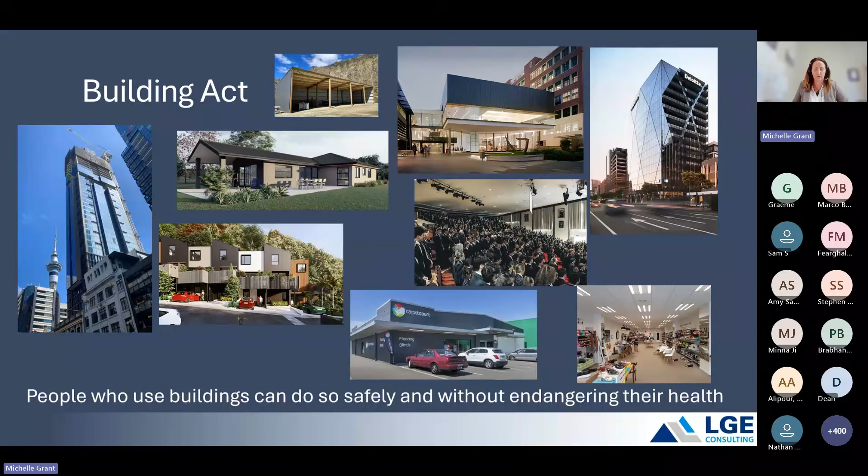In New Zealand, we have a Building Act. And the Building Act sets out the goal that people can use buildings safely. That's priority number one. To achieve this in the design of our buildings, we have our 3 compliance pathways. We have acceptable solutions, we have our verification methods, and we have our alternative solutions. One is a pre-packaged structural solution, whereas a verification method requires a higher level of skill and following some methods and procedures.

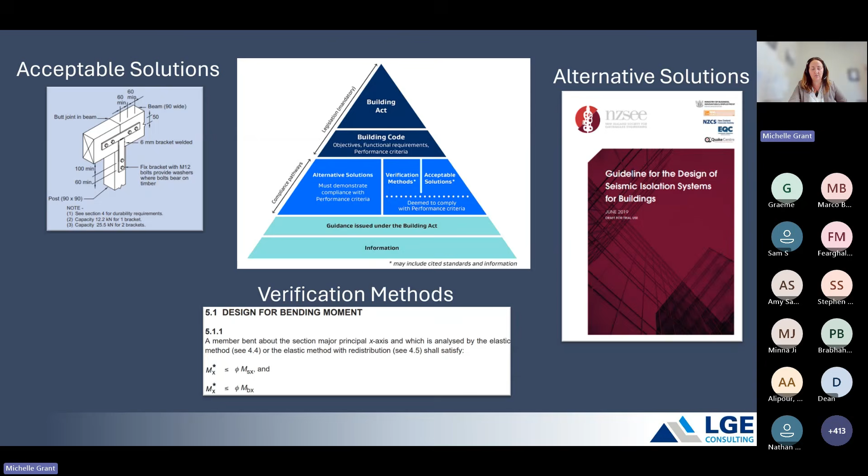And the other is alternative solutions, which tend to be for things that are a little bit more outside the box. So we have a pre-packaged structural solution, a method that requires more skill following methods and procedures, and something that's for things that are a little bit outside the box. My focus today in this presentation is on the main pathway that design engineers use, which is the methods provided within the verification method pathway.

So in a seismic context, design standards for engineers include provisions for seismic systems in buildings, for systems to resist lateral sideways forces, a lateral force resisting system. And the development of a lateral force resisting system is quite a process. A seismic lateral force resisting system is a lot more complex than a gravity support system. It requires a well-configured system detailed for an inelastic mechanism to safely dissipate seismic forces.

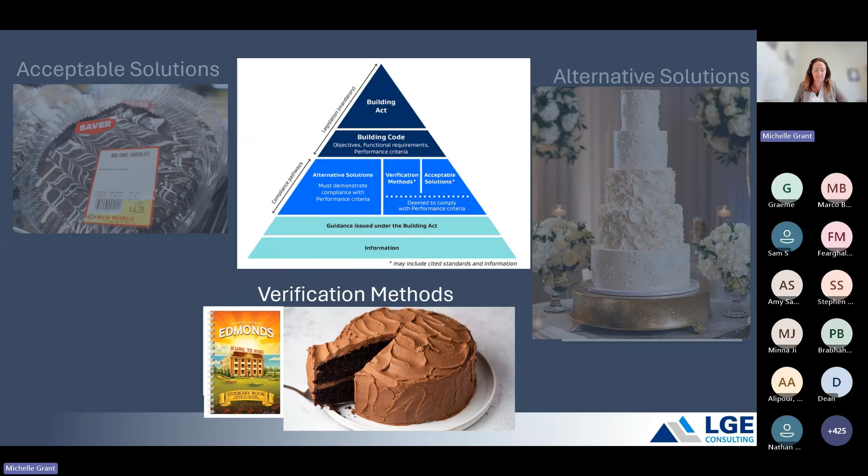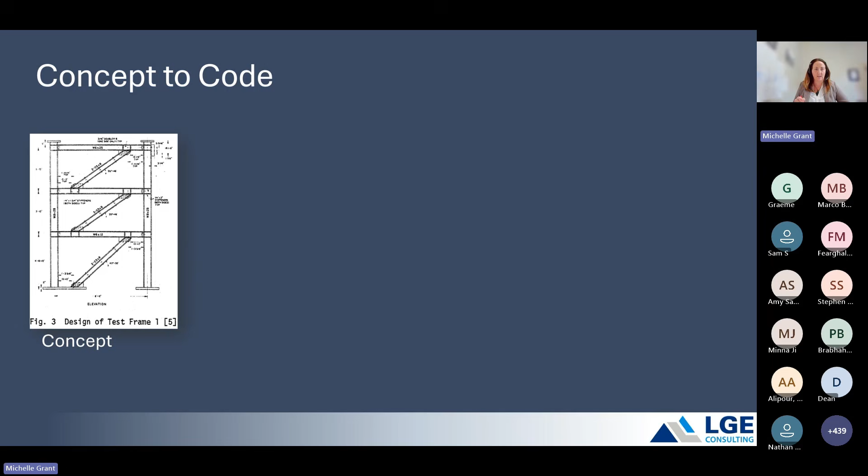There's quite a journey, a proper journey from concept to code. We design these systems using our design standards, our codes, and then we go out and we observe how the system worked in real-world earthquakes. We look at what happened and how it behaved.

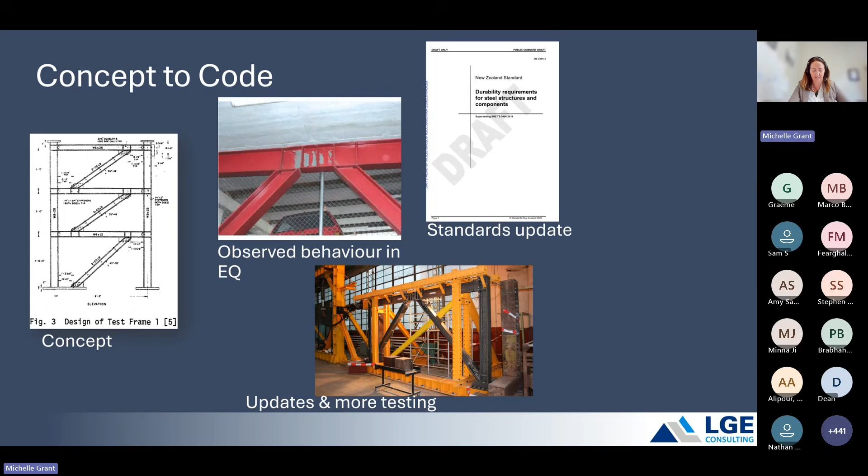After this, we usually head back to the lab and we do some more research and some more refinement, which inevitably leads to updating our design standards and eventually citing these updated standards in our verification method. And we do all of this work to provide a verification method compliance pathway for designers to use.

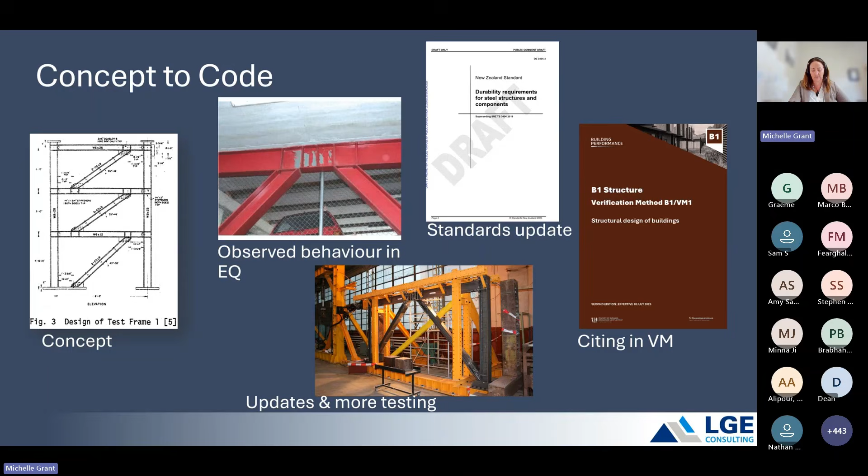And it shows that not all students achieve an A grade. It's fair and reasonable to assume that the same spread of abilities would be reflected in the engineering profession. Not all of us are A-grade students. The majority of engineers, it would be fair to assume, are competent but not experts.

In the year ending September 2025, the value of consented building work in New Zealand was just over $26 billion. And 2/3 of this, a fair proportion, is made up of residential construction. Standalone housing made up $11 billion, a total of 41% of consented building work. Non-residential construction made up the remaining $9 billion, or 1/3 of consented value.

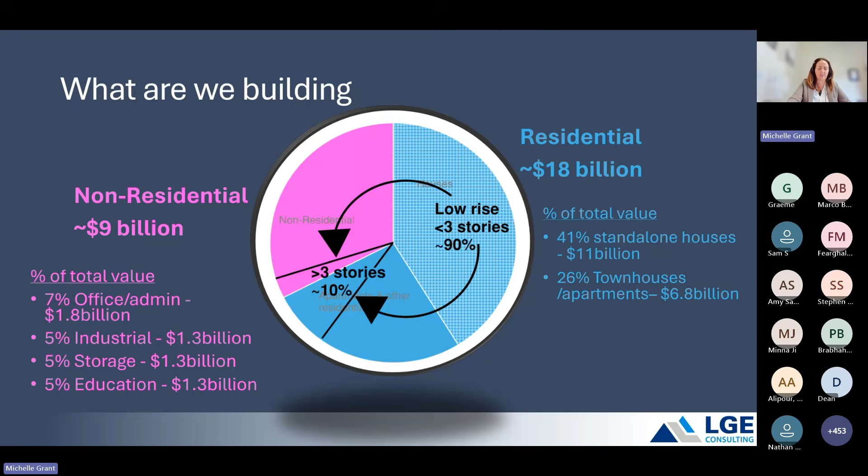Let us now turn to the design of structures for earthquake loads. For this presentation, I have compared our New Zealand design requirements to those of the United States of America, which do tend to follow a more prescriptive approach. The New Zealand standard has some quirks, shall we say, when it comes to the derivation of our loads.

We have a somewhat overly complex and inconsistent load treatment. New Zealand standards require live load to be included with both usage and area-based reduction factors. We also have an additional 8% roof mass lumped at the top, creating a more complicated process with significant variability that does depend on engineers' assumptions, particularly around superimposed dead load. There are some very different approaches to this in New Zealand.

The area reduction penalises small structures, and if you combine that with certain occupancy categories, it can cause live load to dominate seismic demand in lightweight buildings, despite these loads not being representative of actual seismic mass. If we compare that to the USA approach, where they have a simple uniform superimposed dead load prescribed, live load is largely excluded from seismic mass. New Zealand's method is less transparent and can lead to inconsistent outcomes. They also don't have the 8% lumped mass in their structures for equivalent static.

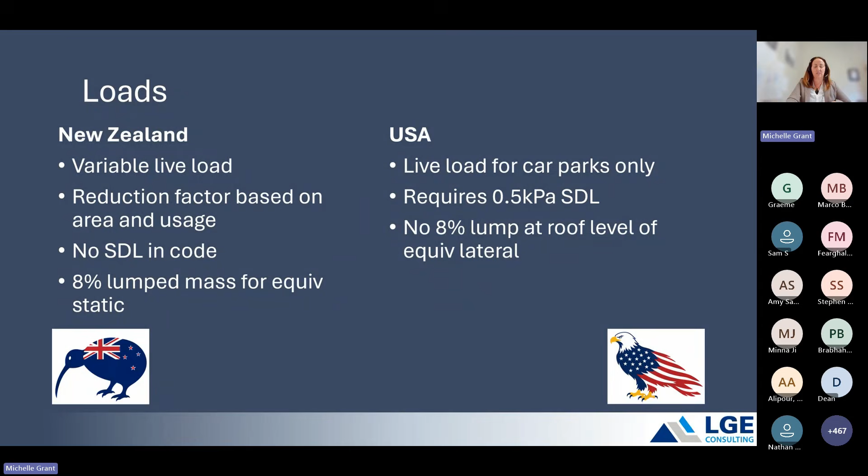Once we have our loads, our demands, the first step in the design of a seismic system is choosing which lateral force resisting system to use. In New Zealand, the loading standard 1170.5 does not prescribe lateral force resisting systems. The description and definition of a lateral force resisting system is designated to the material design standards, which have varying approaches. But for a design engineer, the focus at the start of the design process is on adopted ductility, not on the choice of lateral force system.

For steel, 3404 sets out seismic design requirements for braced and moment frames, with detailing in Chapter 12 and ductility values in Appendix B. This standard's probably at the more prescriptive end of the New Zealand framework. For concrete, 3101 requires engineers to identify potential plastic regions. It defines limits on strain and curvature ductility via the KD factor, which is linked to overall system ductility.

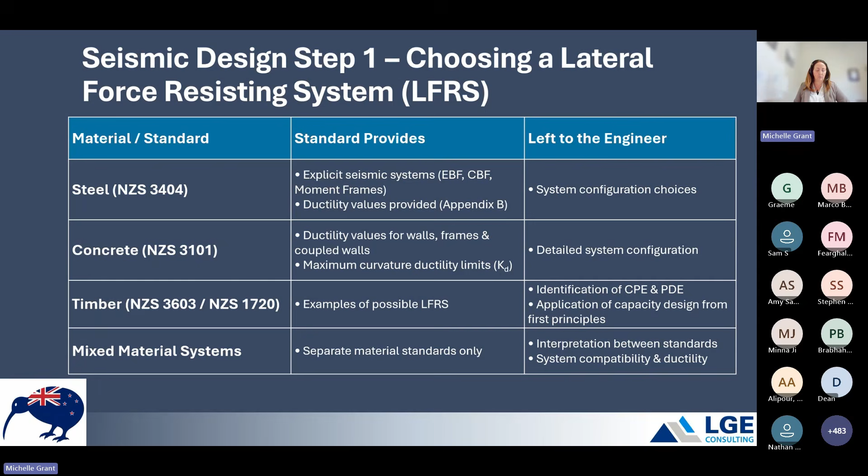We also don't have clear limits in New Zealand on when a designer can use a certain system. And this leads to engineers designing structures, for example, as this one here, with plasterboard walls providing support to masonry block walls out of plane. Plasterboard walls holding up something very heavy out of plane. Another common example is non-ductile cold form steel frame structures supporting heavy, tall precast concrete panels, which you see on industrial and commercial buildings across New Zealand.

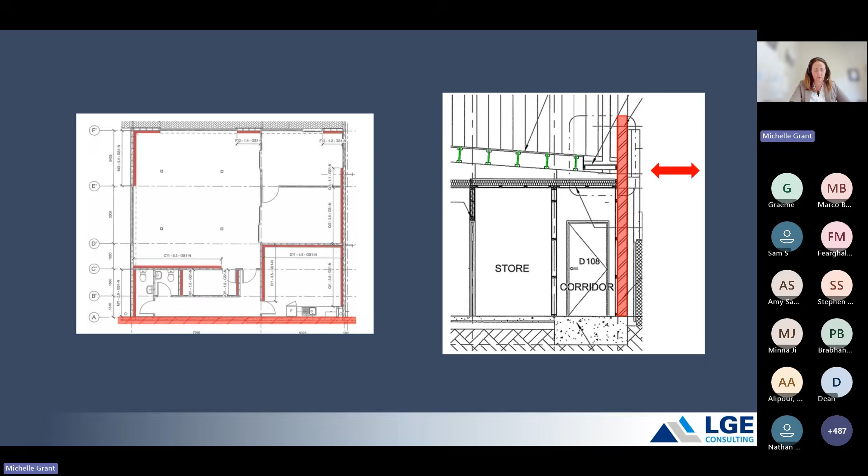In comparison to the New Zealand approach, the USA loadings code, ASCE 7, has a large table of allowable lateral force resisting systems available to the design engineer. It limits design choices to reliable, tested, and robust lateral systems. Design requirements for these listed systems are provided in the USA equivalent material design standards. The list is reasonably comprehensive. It's quite long, and it does include mixed material or composite systems.

It has very clear limits on the use of certain systems. A designer can use an ordinary steel moment frame. So for us, that would be a nominally ductile, so pretty low seismic capacity steel moment frame. They can use that in a high seismic zone. However, there are very clear limits on height, how high it can go, and weight, what it can hold up. You can't hold precast concrete panels up with such a frame. Look, it's not all green on the other side. The content of these tables in the US is very contentious, from the process of how they add systems to the tables to the values for ductility assigned to each system.

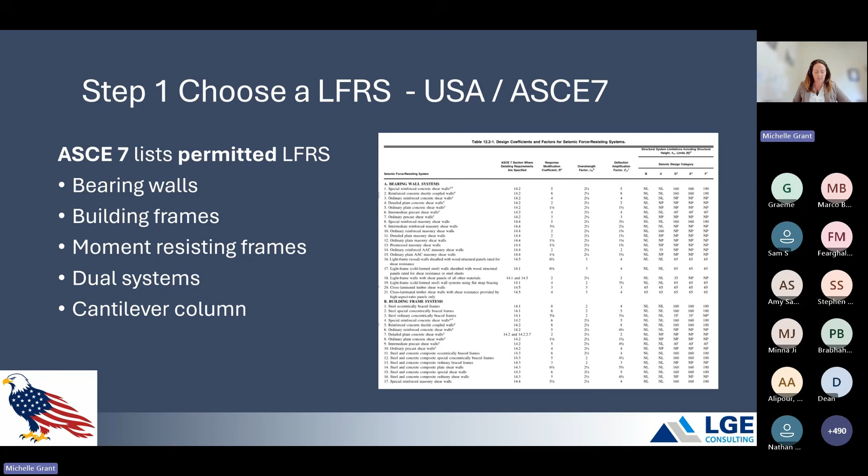Let's now take a look at the design steps for a lateral force resisting system. If we take something as common as a plywood shear wall, in New Zealand, the engineer must design every component from first principles. Listed here are the design steps that we follow from NZS 3603, from nail shear capacities to checking the plywood sheets in plane. Each component is checked and designed so the engineer then comes up with a system.

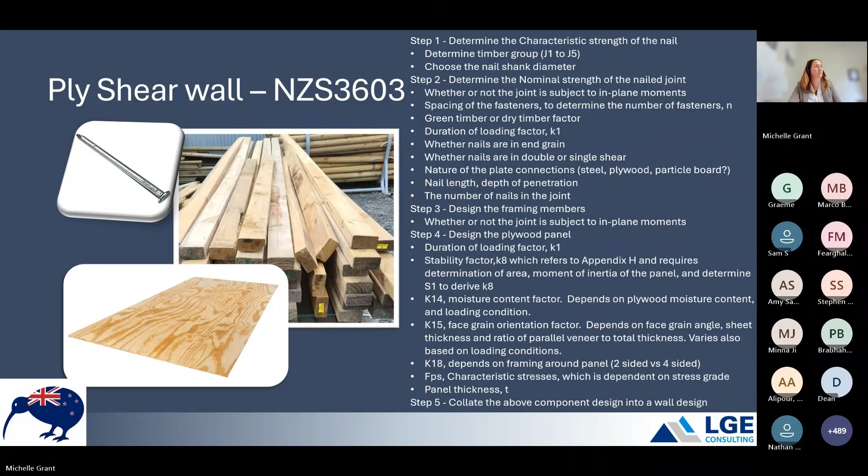In the US, the engineer selects a system from a table. If I need 8 kilonewtons per metre, it tells me that my system involves using 9mm ply lining on a timber frame wall with 2.8 diameter flathead nails at 150 centres, with a safety reduction factor then applied.

The USA standard, for this simplicity, does however require the designer to think more about how the wall system overall actually works. What's needed for the wall? Is it a standalone full height wall? Does it do force transfer around openings? Is it a punched shear wall? How's it working? What are the collectors doing and how are things joined together? So more of a systems focus as opposed to component design.

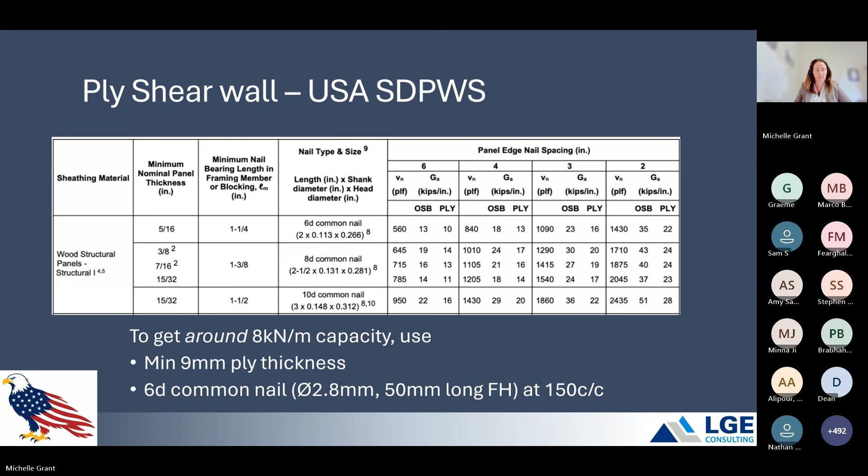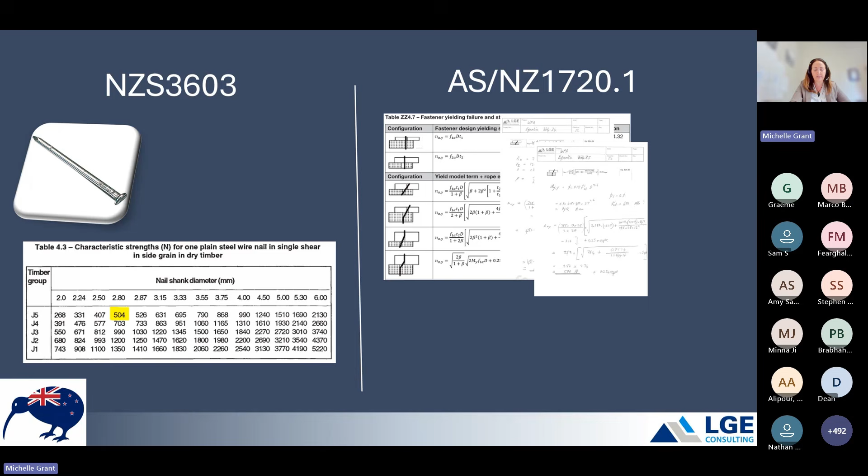And the New Zealand design process is becoming more complicated by the recent publication of the updated Timber Design Standard 1720.1, which is requiring more complicated and iterative first principles equations. And the question must be asked if the more complicated New Zealand process is providing better design outcomes for buildings in New Zealand.

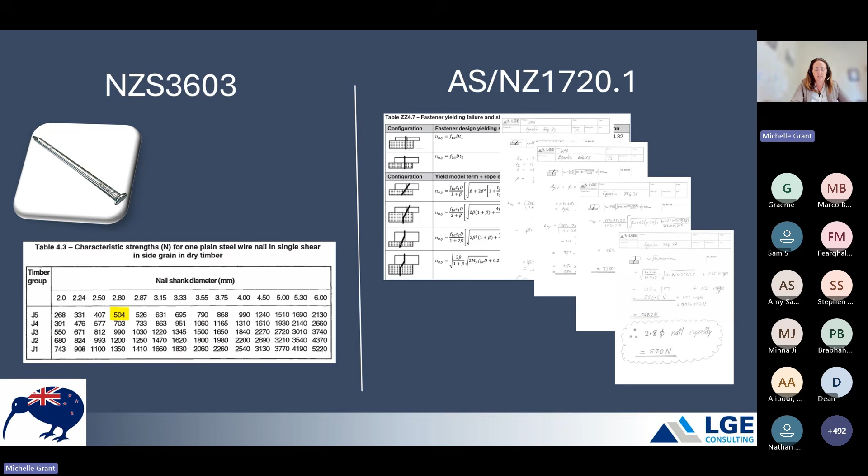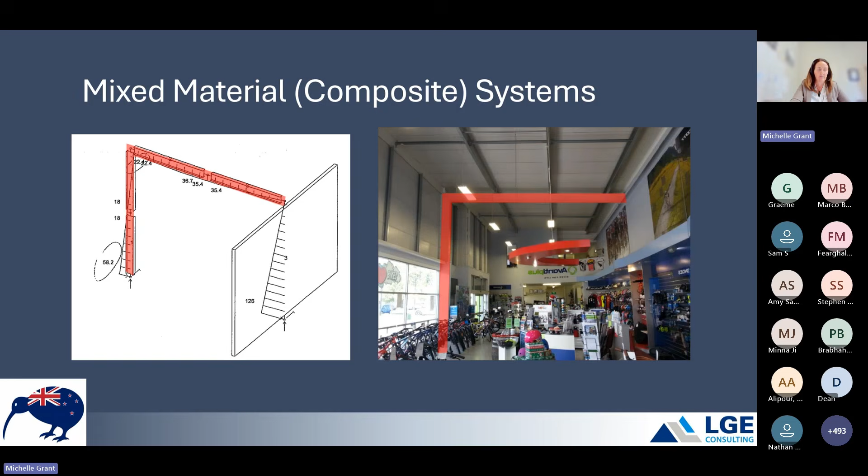In comparison, the USA provides an acceptable list of composite lateral force resisting systems within ASCE 7, and the design requirements for the composite systems on this list are provided within one of the material standards. One of them takes ownership for the system and provides the overall system design requirements. It's interesting to note that under the USA system, that previous example of the New Zealand attempt at a composite system would not be permitted. It's not a permitted system.

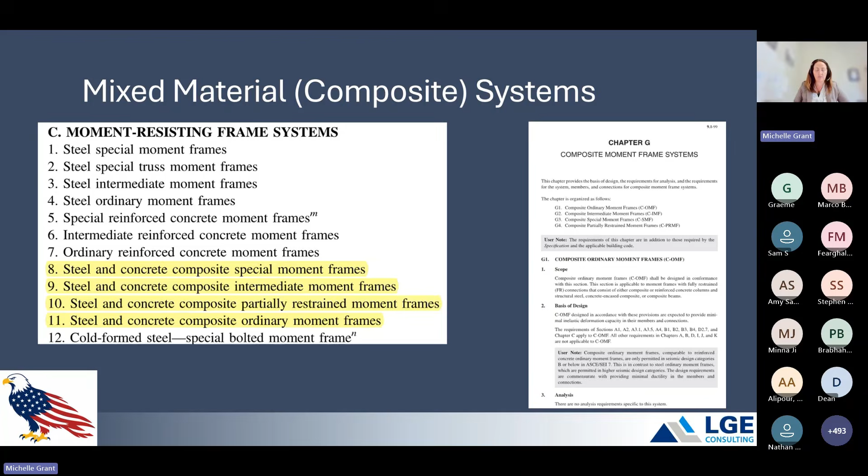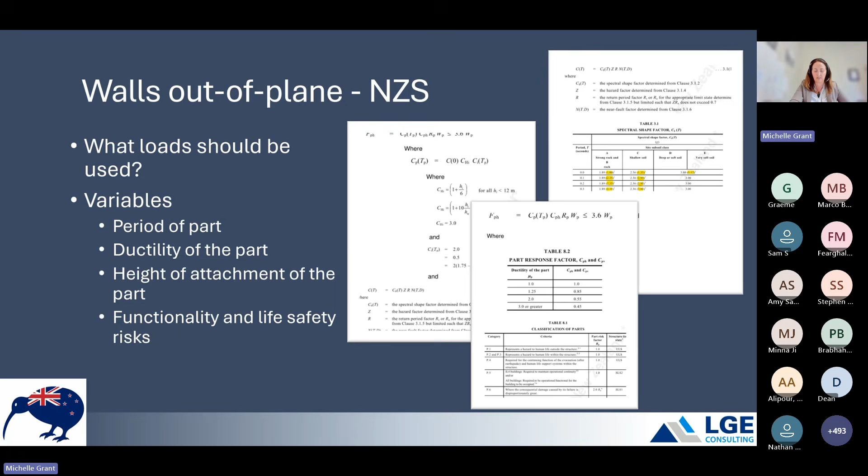What about the design of some of our building parts, such as a wall out of plane? In New Zealand, even a simple element like deriving loads for a wall out of plane requires some reasonable maths and interpretation of a standard for what is, you have to admit, a pretty common feature in pretty much all buildings. In the US, it's a simple formula of a portion of the short period spectral acceleration with an importance factor modifier.

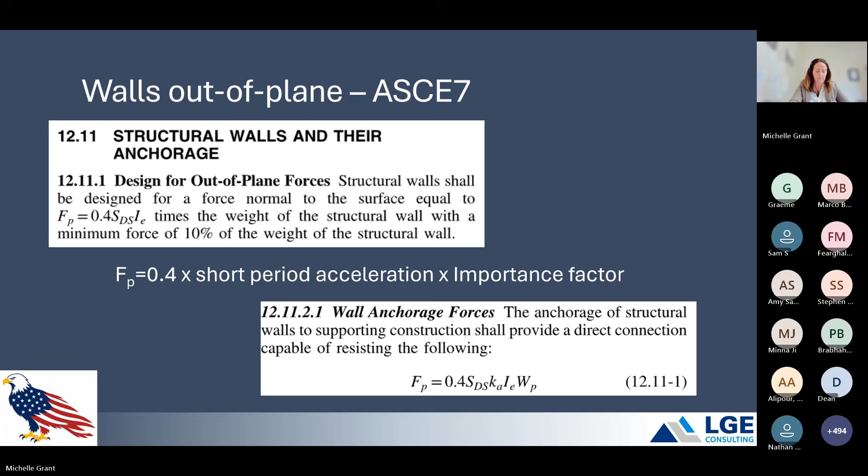What about the requirements for the anchorage of walls out of plane? Again, in the American standard, it's a very clear equation with requirements spelled out on when an engineer must check bending of the wall between anchorage points. If the spacing of my anchors is greater than 4 feet, I must check the bending of the wall between the points of anchorage. Some people call this prescriptive, but I think it's just clarity. And in New Zealand, even with our standard, with more equations, it was so unclear if parts applied to walls out of plane that it took a determination to confirm how we are meant to derive loads for this common feature.

In New Zealand, we have a system where components are certified, marketed and adopted by engineers. However, their use in a seismic system is either not fit for purpose or poorly executed. We have CodeMarks issued for systems that then seem to sit outside the available verification methods. If we compare this to the pre-qualified connection system that's used in the United States, these are connections that are pre-qualified and designed to ensure that they meet the inelastic rotation requirements of a specific lateral force resisting system. We know that if we follow these procedures, these designs will work.

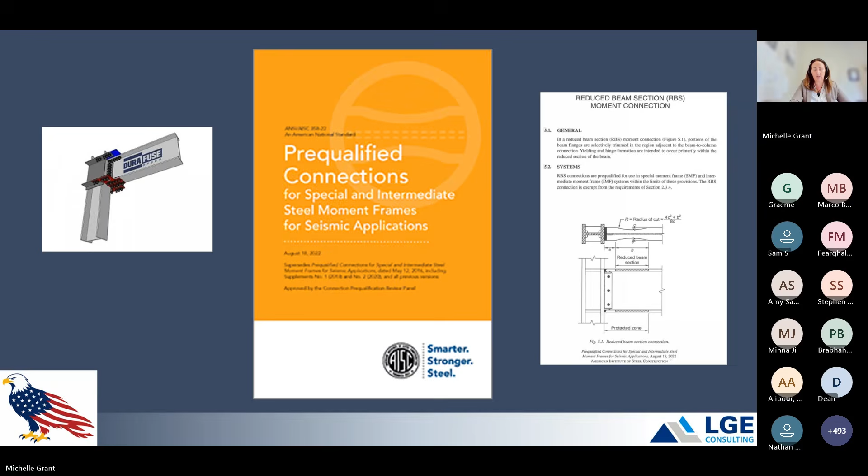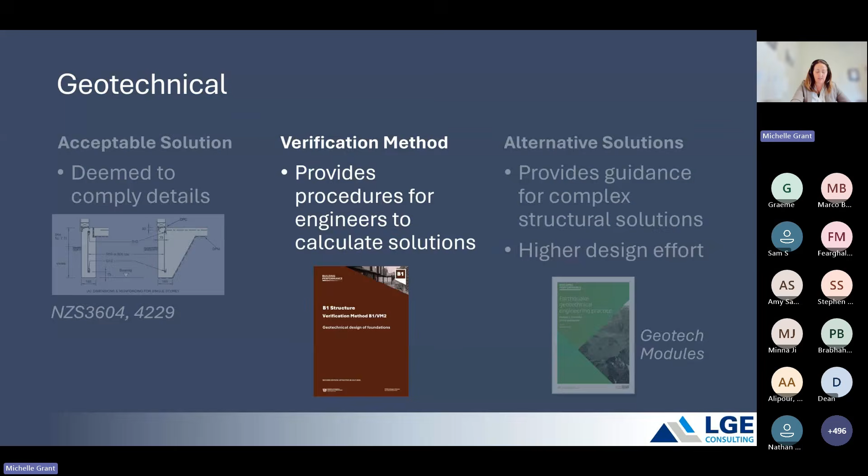What about geotechnical? Foundation design has the same framework of acceptable solution, verification method, and alternative solutions. But again, I'd like to focus on the verification method, same as I have for structures. For something as critical as foundations, as important to your building as the ground beneath it and the design of that, the confirmation of the ground model and soil parameters is outside the scope of VM2, the verification method.

In VM4, which is now VM2, safety factors were meant to be approved by the territorial authority, which does not and did not happen in practice. And I note that this is not in VM2 when it was updated, it's been removed. It's also a point to note that the safety factors clash with the geotechnical modules and they're non-conservative in the verification method.

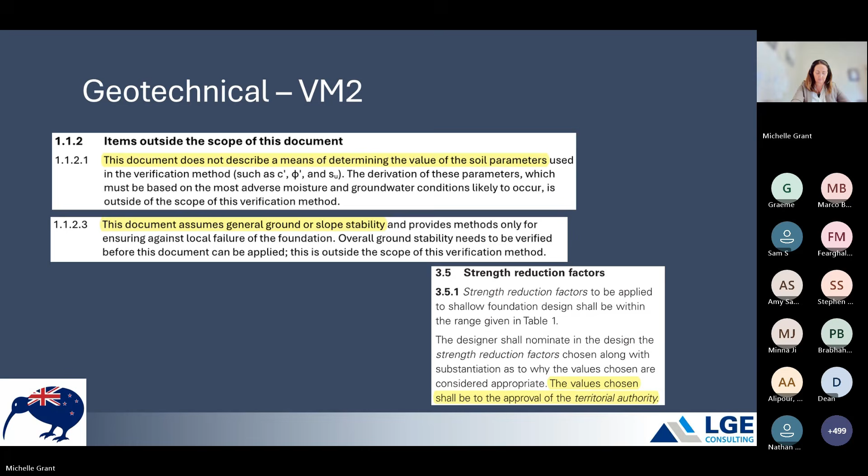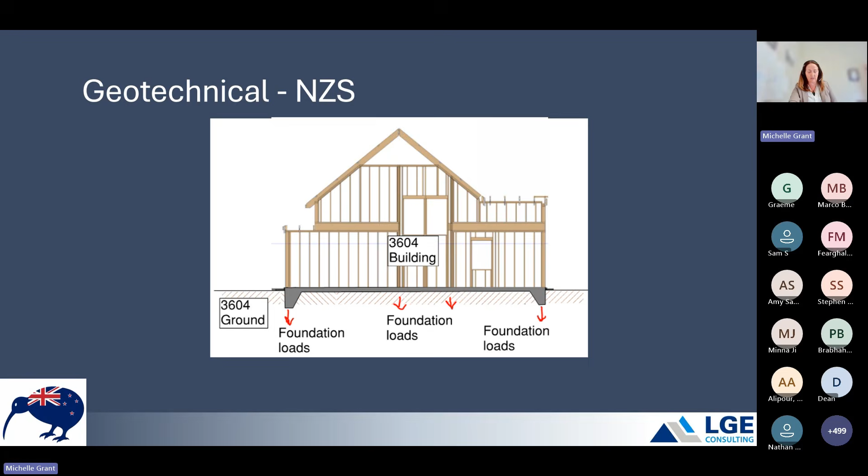For foundation design, we do have the acceptable solution NZS 3604 for timber frame structures. 3604 defines limitations on use, both relating to the structure and the ground. It sets out requirements to confirm the soil parameters and provides lower bound bearing values. But once you step outside of 3604 and you put a verification method structure on the ground, the compliance pathway becomes a lot more murky.

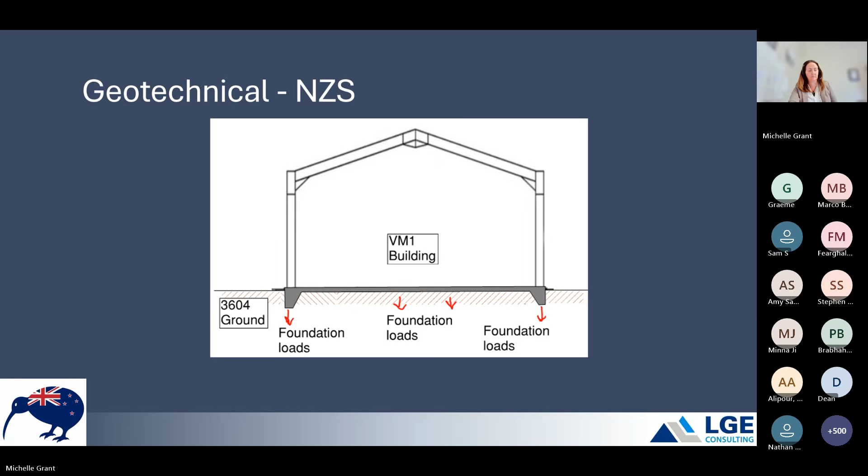We compare this to the US. In the IBC, they have conservative presumptive bearing values, appropriately lower bound, and conservative bearing values across different soil types, which at least sets some consistency in the industry and acts as an encouragement for clients to engage with geotechnical engineers to be able to let their structural design be more economical and efficient in terms of their foundations. The safety factors are provided in ASCE 7, so everybody's working to the same safety factors.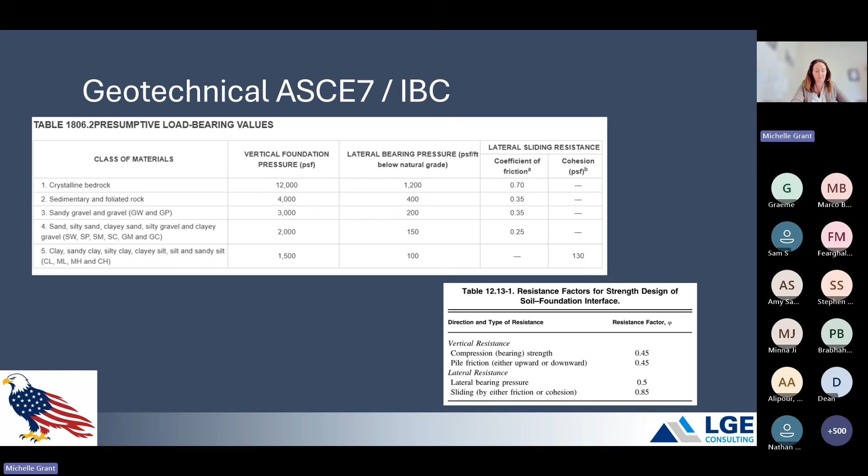So why is seismic design in New Zealand so hard? Why is it so hard? We allow engineers to configure the lateral force resisting system with their choice of members and materials. This leads to systems being designed, consented and built which have never been tested, either in the laboratory or in the field in real earthquakes.

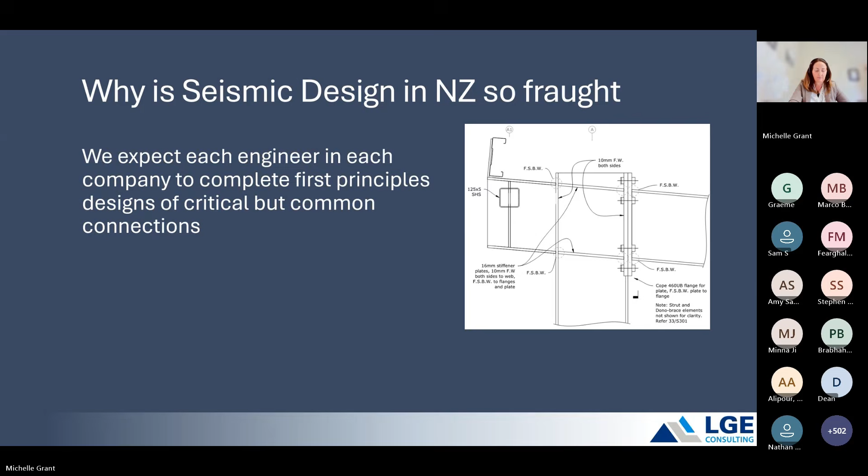We expect engineers to design for ductility while not providing clarity on how for common lateral systems. For a simple timber portal frame, what mechanism should I be designing for? Do I use flathead nails yielding at the knee joint? Should I use a plywood gusset or steel plate gusset? What detailing do I need to use to make sure that the joints do not lose integrity under repeated reverse cyclic loading? Do I protect my connections to the foundations?

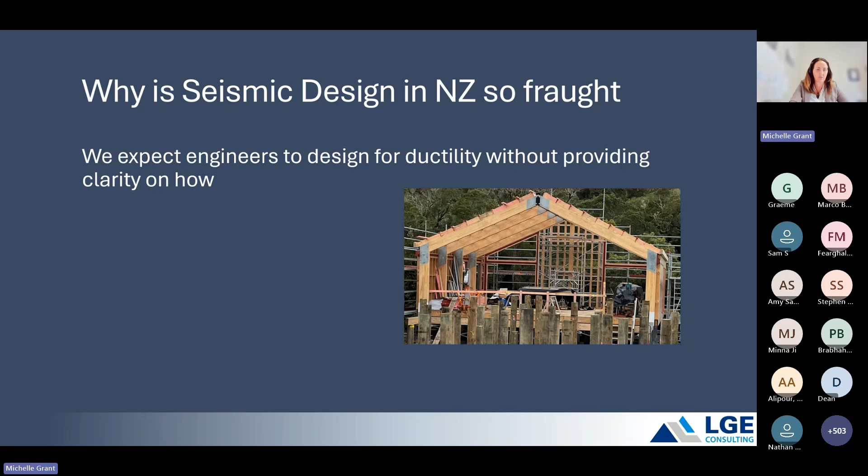What about at the apex? Are there special considerations for the timber sections? Should I use glulam or LVL, or probably not ply box beams? It took over 20 years of research and testing before industry adoption of an EBF, yet the New Zealand design engineer is expected to configure their own lateral system, identify the capacity protected and potential ductile elements and successfully apply capacity design.

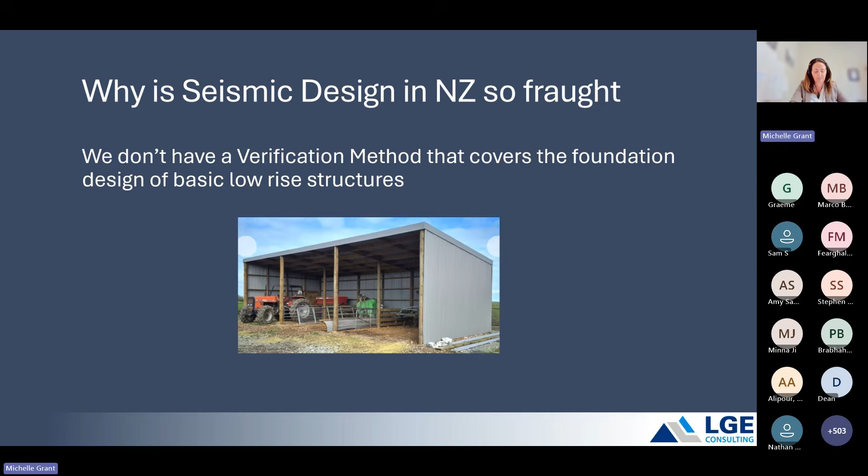We don't provide a clear verification pathway for foundations for even the most humble of structures. And in some cases, we require complex or ambiguous load derivations for very common situations. And when you step back, we're asking every engineer in every office across the country to solve the same complex problems from first principles every time.

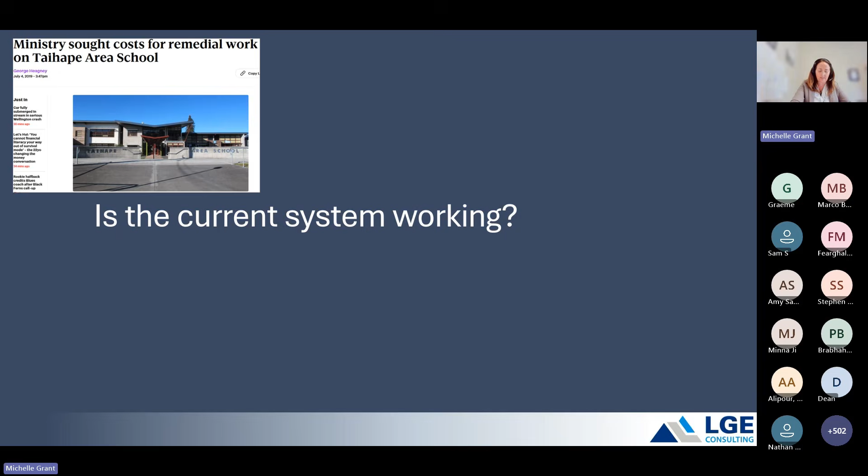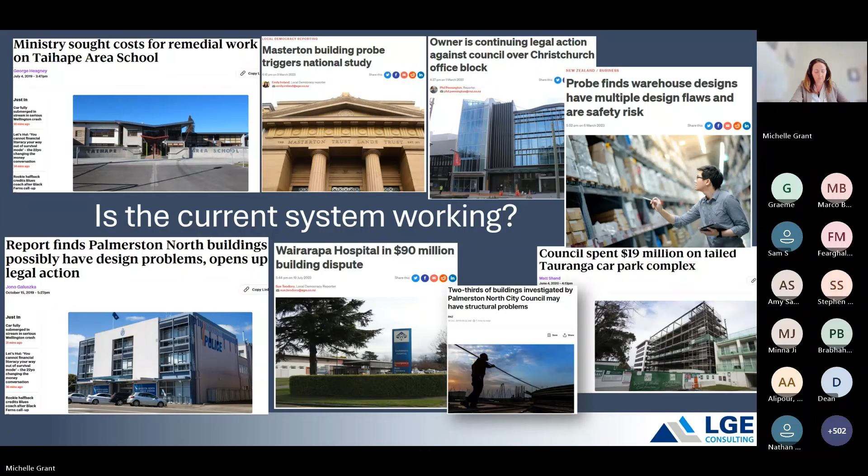And is this system working? At best, our system is leading to inefficiency, but at worst, it's leading to mistakes. We are seeing poor lateral force resisting systems being designed, reviewed, consented, and built. The building code objective is simple. It's to keep people safe.

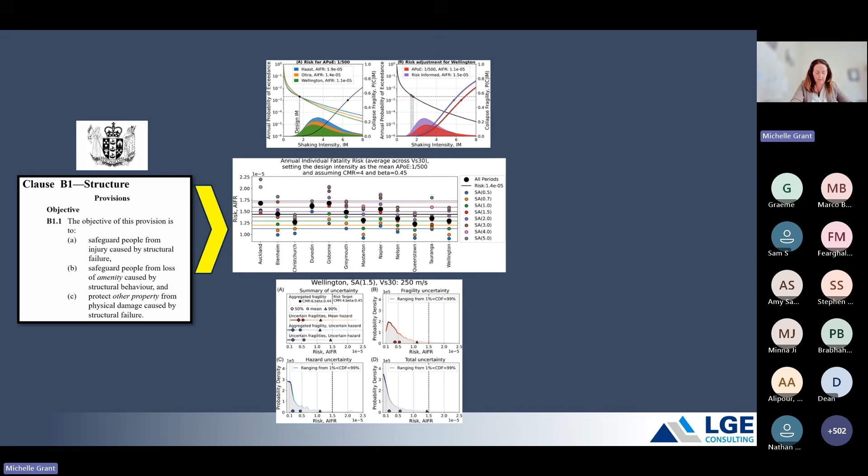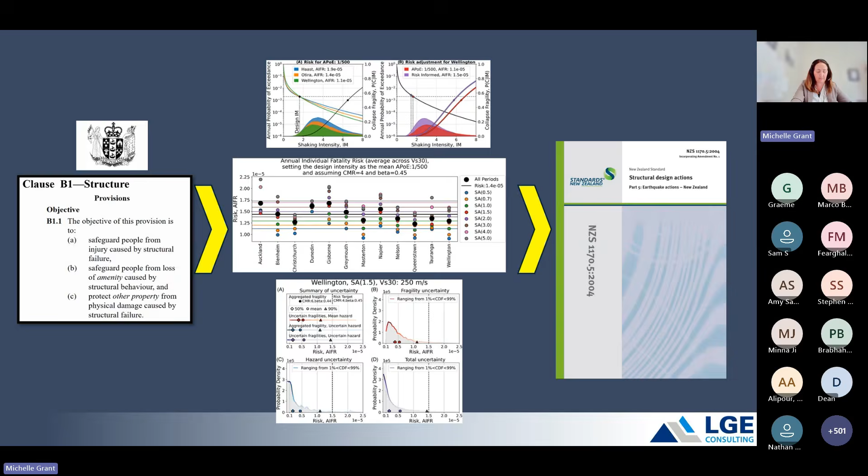Engineers translate the building code objectives into life safety performance requirements. We look at collapse margin ratios and annual individual fatality risk, and we turn this into a design standard. And we do all of this so that people who use our buildings can do so safely. So what do we need? We need a verification method that the average competent engineer can use for the majority of buildings that leads to a structure that meets B1.

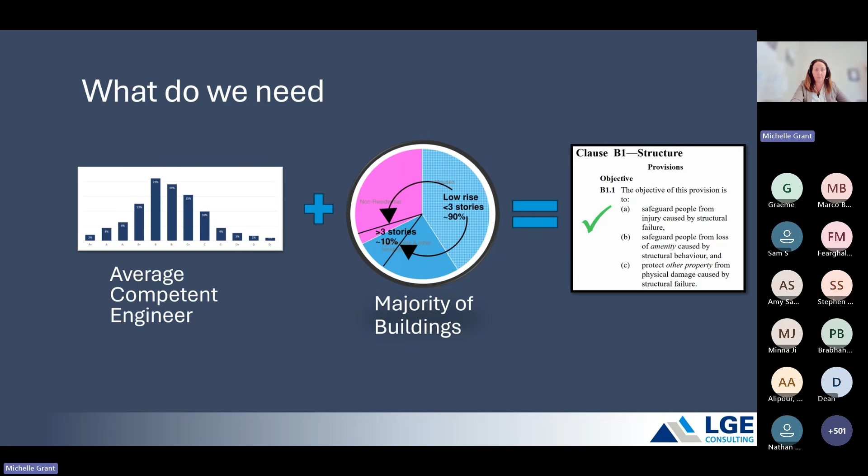And to do this, we need the average competent engineer at the standards committee tables, working together with industry experts and academic researchers. And this can be a problem. The engineers designing everyday buildings are not typically well represented in the standards process, not because they don't want to be, but because of time and commercial constraints. And if I pull on some anecdata, it can be quite intimidating for an engineer from a smaller practice to contribute to standards committees with very strong interests present or industry leading persons with more technical qualifications.

A verification method should be provided with the primary consideration of achieving the building code objectives for the 90%. The aim of such a method would be to provide a clear compliance pathway for the 90%, making it clear for the designer what they need to do, what they're trying to achieve. This method could be specifically for low-rise buildings. However, it's likely this approach would also suit higher-rise structures, as is the case in the USA.

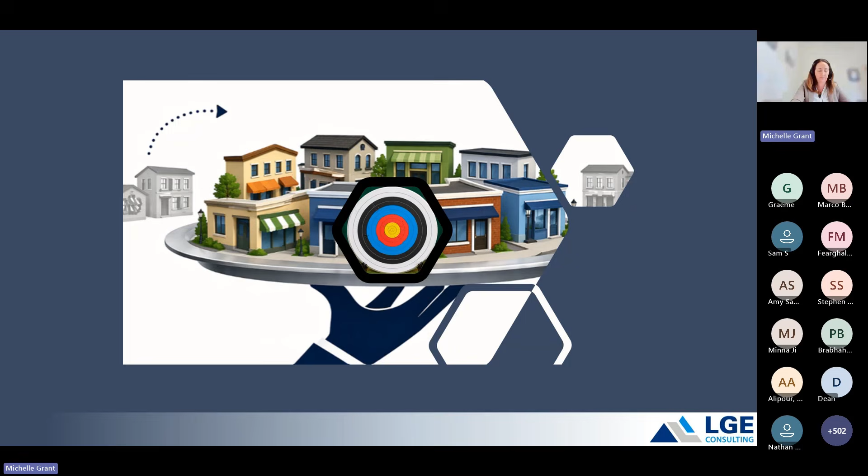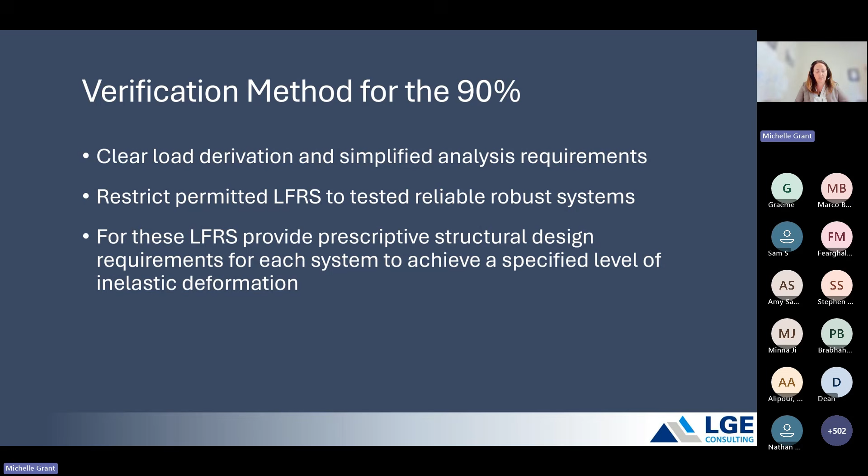So what would this look like? Lateral force resisting system configurations should be limited to those that have demonstrated robust performance and clear design pathways through either international experience and design standards or through local research. Design engineers should be provided with prescriptive, clear structural design requirements for each of the listed lateral force resisting systems. These requirements should clearly describe the basis of design, the configuration, limitations of use, and the acceptable means of achieving a defined level of inelastic deformation capacity.

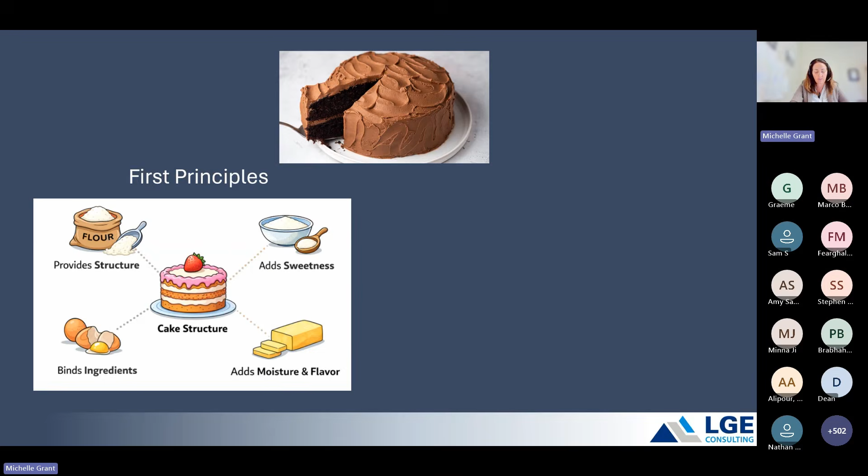If we look at the different ways we can provide someone with the information to bake a cake, we can give them first principles component information. We can tell them all about eggs acting as a binder, sugar adding sweetness. We can tell them about dry to wet ratios for mixing ingredients to come up with a cake. Or we can do what we know works best and provide them with a prescriptive method that we know that if you follow this process, you are going to get a banger of a cake.

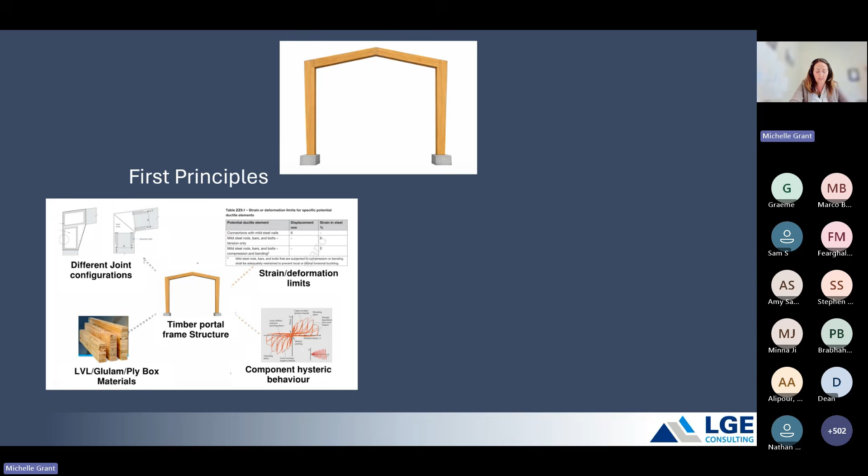And for our structures, we have the same option. We can give engineers first principles information on components and materials, or we can provide a prescriptive method that we know is robust, that we know will give you inelastic deformation capacity, and that we know will perform. This type of targeted verification method for common systems would provide, in my opinion, significant benefits and increased efficiency, which we desperately need for our construction sector.

The natural criticism of this type of approach is that it may encourage engineers to turn their brains off, but I'd argue that it makes it easier to get it right and leaves more time for actual engineering to focus on the important things like load path and coordination with the architect and contractor. How are my services reticulating through my building? How are my diaphragms working? How is my actual overall building structure coming together?

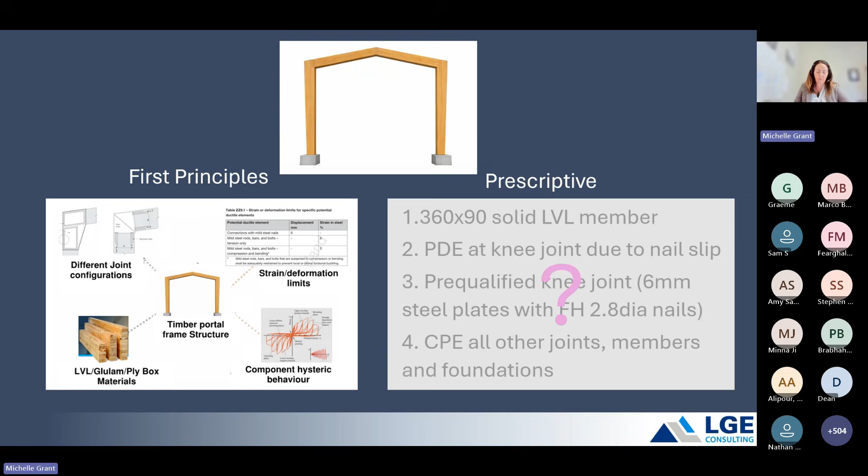And all the other things that I need to do as an engineer to make sure that a good building is being built. And a reminder, I'm talking about the 90%. A pathway will always exist for doing a more bespoke approach for outside the box. Regulators would have clearer boundaries, enabling more consistent risk-based consenting. Design processes could be standardized, freeing engineers up to focus on those things I was talking about, on getting the overall system right, not the minutiae of design.

Builders and fabricators would definitely benefit from consistent, pre-qualified details, as opposed to the current situation. You go and talk to any steel fabricator or builder and they will tell you each engineer does things differently. He's giving them different details with different requirements. If we had consistent pre-qualified details, it would improve our efficiency both on and off-site. Peer reviews would become simpler and less subjective, with less reliance on an individual's interpretation of component design requirements within a system.

Clients would have greater confidence in what they're getting. They would know that they're getting a robust, well-tested system with a clear design pathway. Most importantly for us as engineers, we would have a clearer pathway to good design, with fewer opportunities for error and more time to focus on the fundamentals that really matter. We can do this without inventing the wheel again. New Zealand is a small country. We have limited resources, and as much as possible, we need to leverage off all the hard work that our international colleagues have already done and look at international standards.

We often think of seismic design as a purely technical problem, but it sits within a regulatory system that exists to serve New Zealand society. So it's not just a technical problem, it is societal. We've already seen recently what happens when a technical system doesn't deliver the outcomes that are understood by society, trusted, or seen as fair for the majority. The earthquake-prone buildings framework is a very clear example of this. The percent NBS system, while technically grounded, became seen as inconsistent, misunderstood, and ultimately seen as not fit for purpose in the eyes of society.

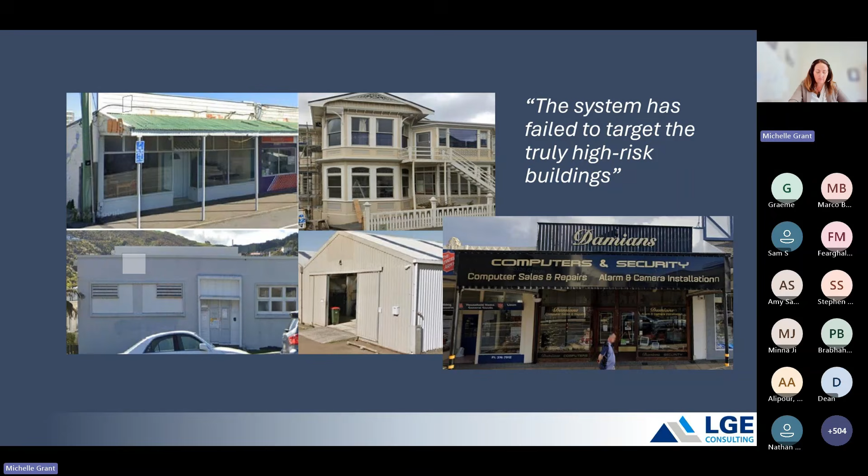If our design standards are too complex, too variable, and too dependent on individual interpretation, and too many mistakes are being built, then we shouldn't assume the system will stay as it is, and nor should we want it to. In my opinion, the current system isn't working well for the 90% of buildings. It's not working well for us as engineers, nor for BCAs trying to regulate our designs, or for the building owners. Certainly not for these building owners.

Alistair Cattanach spoke at the conference about the risk of trust in our profession. And it made me reflect. After the Christchurch earthquake, one of my clients told me that you engineers are kings now. And it's not hard to see that there's been a slow erosion of trust in our profession over the years since, with the press around poor designs and the shift in the EPB system.

If we don't take the opportunity to look at how we are doing things, how we're designing our buildings, and to try and make it work, the regulator has shown that they can and will redefine the system until it does. Our measure of success lies in where the rubber hits the road, what is actually being designed and built. Because in the end, it's not the theory in our standards that matters, it's what's actually getting built.

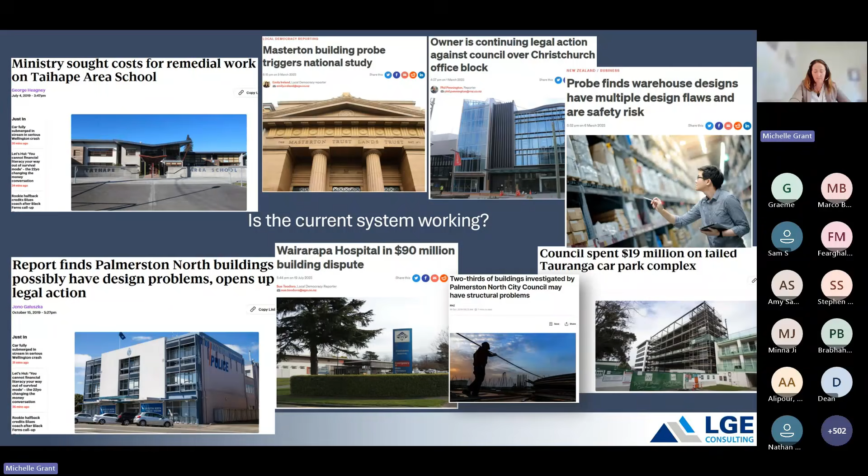And as we have time for a discussion now, I would like to encourage you all to please share your thoughts and opinions. I am one voice, one person, and this is one opinion. So please, there's a survey. It's very short, I promise. I really encourage everybody who's online today to please take the time to share your opinions in this survey. It's being hosted by NZSEE. If you're a member of another collaborating technical society, SESOC and NZGS, and you or your company has an opinion, I implore you to also please get in touch with them and share your thoughts on this. But if you can do the survey as well, so we can get a large capture of opinions.